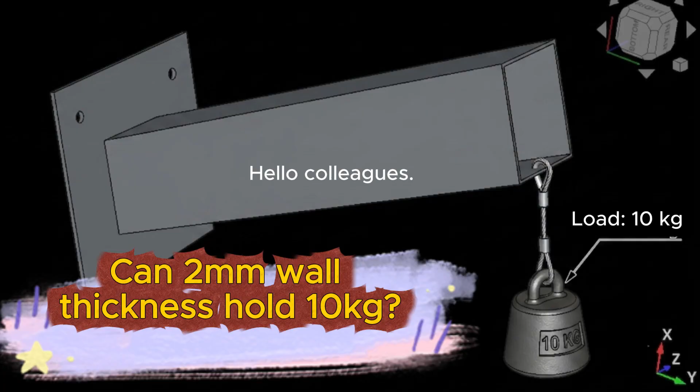Hello, colleagues. We are here with a new FreeCAD 1.1 video. Today, we will analyze the strength of the system you see on the screen under a 10 kilograms load using FreeCAD version 1.1.1. We will see in which direction and how much our material will flex, bend, or whether it will break under this load. We will also analyze the risk level of this amount of deflection and bending.

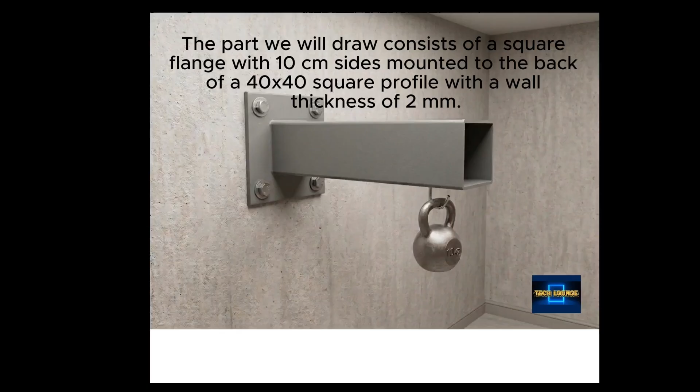First, we will quickly draw this part in FreeCAD. Then we will move on to the analysis phase. The part we will draw consists of a square flange with 10 centimeters sides, mounted to the back of a 40 by 40 square profile with a wall thickness of 2 millimeters. The length of our profile will be 20 centimeters, fixed from one end and free at the other. In technical terms, we will draw a cantilever beam and then analyze it.

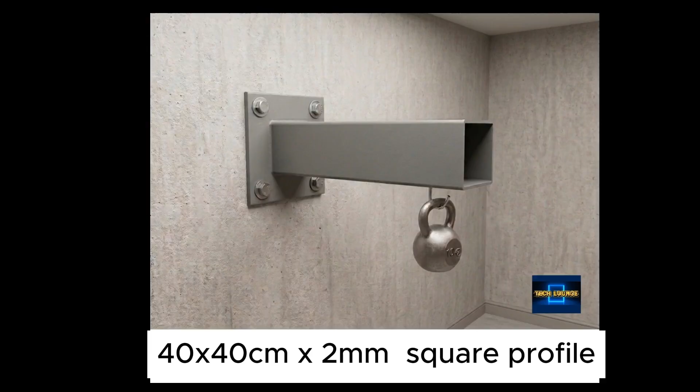Let's get started. As usual, we start our drawing with a parametric body. I am switching to sketch mode. From here, I select the XZ plane. In sketch mode, from the right side, I activate my rectangle tool and then the rectangle from center tool. Right from this center, I'm drawing a 40 by 40 millimeter square.

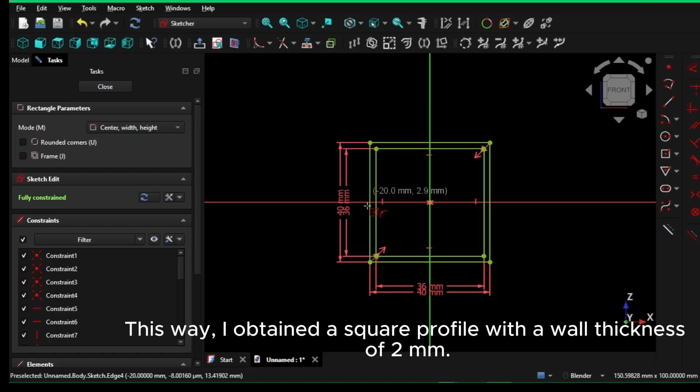Without changing my drawing tool, I continue with the same tool. This time, again from the center, I draw a 36 by 36 millimeters square. This way, I obtained a square profile with a wall thickness of 2 millimeters. I click Close, Exit, and extend it using the Extrude command by 200 millimeters, which is 20 centimeters.

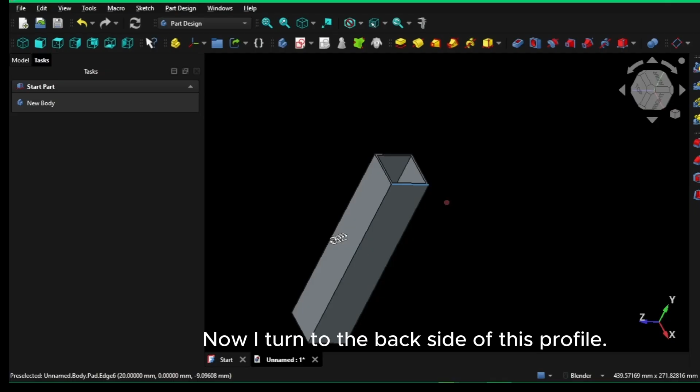Our profile is ready. Now I turn to the back side of this profile. I orient the rear view facing me, and by clicking on the wall thickness, you see, I create a sketch on this face. With this created sketch, again starting from the center, I draw a 10 by 10 centimeter square for the flange. And I click Close to exit. I select Extrude. I turn this into a flange with a thickness of 3 millimeters in the direction shown.

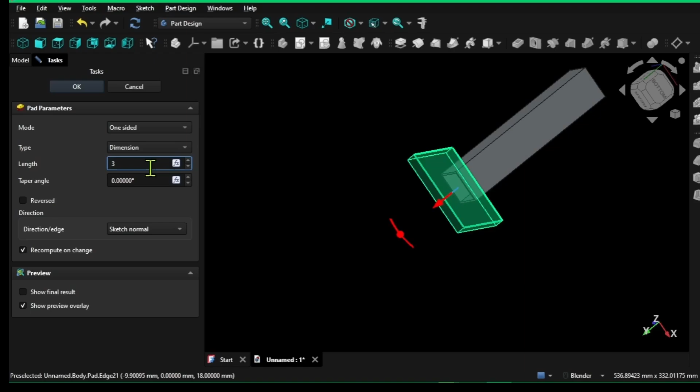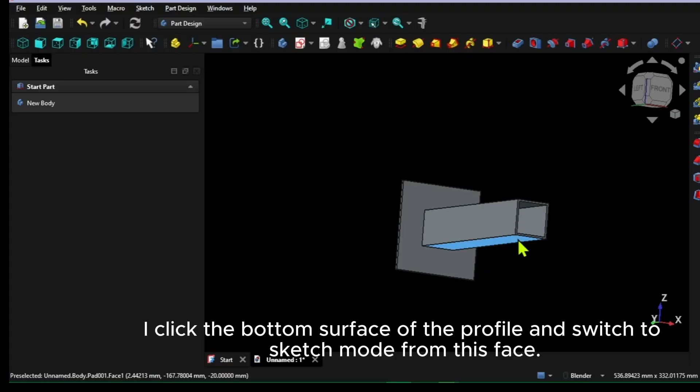Yes, our part continues to take shape like this. We have one final operation left. We will drill a small hole at the tip of the part. This hole will be where we suspend the weight. I click the bottom surface of the profile and switch to sketch mode from this face. I bring the part towards me a bit and zoom in slightly. I will drill a hole on this surface.

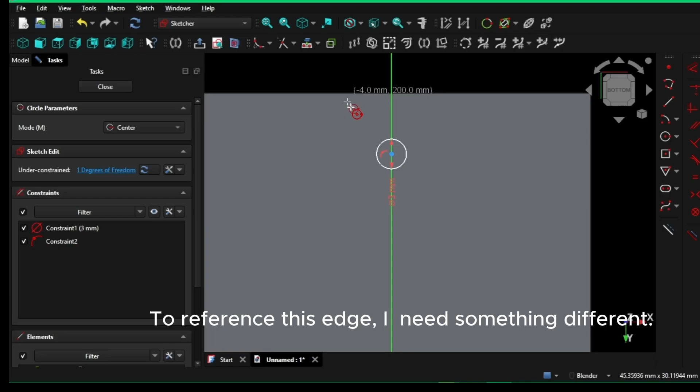I select the Circle tool. Since this axis is right in the middle, I draw a small 3 millimeters hole right here on my part. Or rather, I define a 3 millimeters diameter circle for the hole. Next, I want this circle to be 1 centimeter away from the tip of this profile, but I can't catch that edge. To reference this edge, I need something different. I click the external geometry icon up here. Then click the edge.

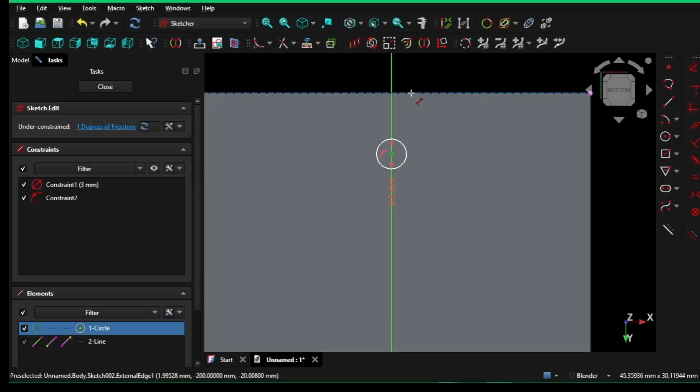Then I click the dimension tool and set the distance between the edge and the center of the circle to 10 millimeters. Yes, now it's offset 10 millimeters from the tip of the profile. I am done here. I use the pocket command to cut in this direction. As our wall thickness is 2 millimeters, the default value of 5 millimeters for the pocket command is OK. I click OK, and we have created the hole this way.

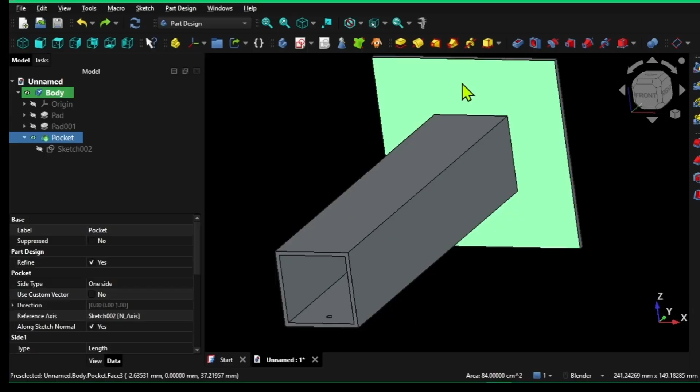Although they won't be included in our analysis results, to ensure a more realistic appearance, let's drill 4 mounting bolt holes on the rear flange. I click the front face of the flange. I switch to sketch mode. I select the circle drawing tool. I'm drawing a 5 mm diameter circle roughly around here. I want this circle to be 1 centimeter away from both the top and left edges of the flange.

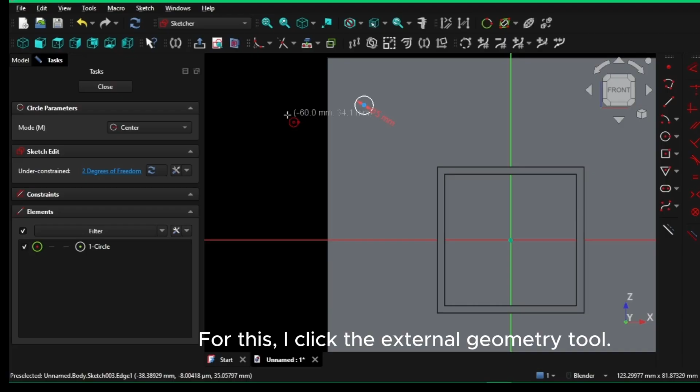For this, I click the external geometry tool. As before, I add a construction line to both edges of the flange. Then I select the Distance Dimensioning tool. I set the distance between the center and this line to be 10 millimeters. Similarly, I set the distance between the center and this line to be 10 millimeters as well.

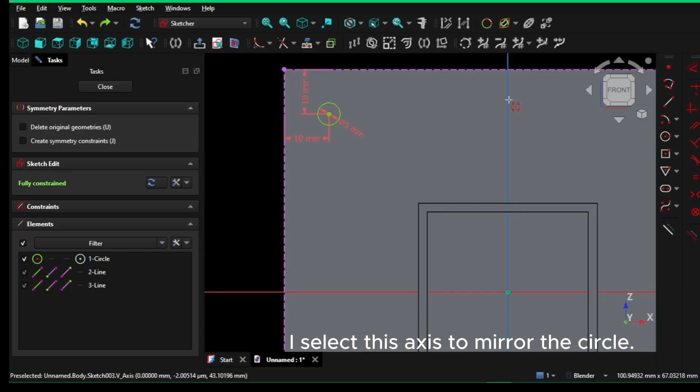Then I select my circle. I activate the mirror command. I select this axis to mirror the circle. Look, on the right side, it created a symmetrical copy relative to this axis. Now I select the right circle. I clicked mirror again. This time I select this axis as the mirror axis.

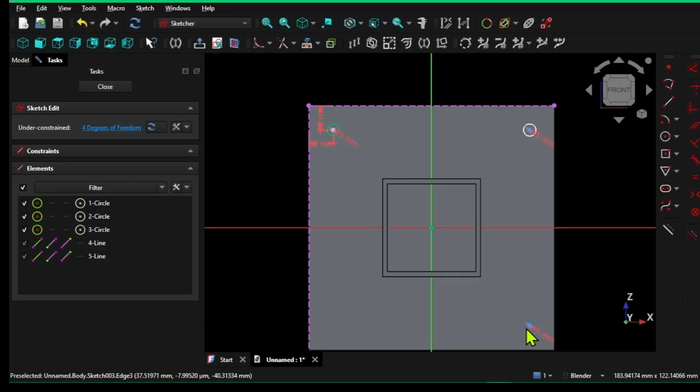I select the first circle once more. I activated the mirror command again. I selected mirror relative to this axis. Thus, 4 symmetrical circles were created relative to the center. I exit from here and create the 4 holes using the pocket command. I'll just leave the default 5 mm value as is. Now we are ready for the FEM analysis. We switch to the FEM workbench and start our analysis.

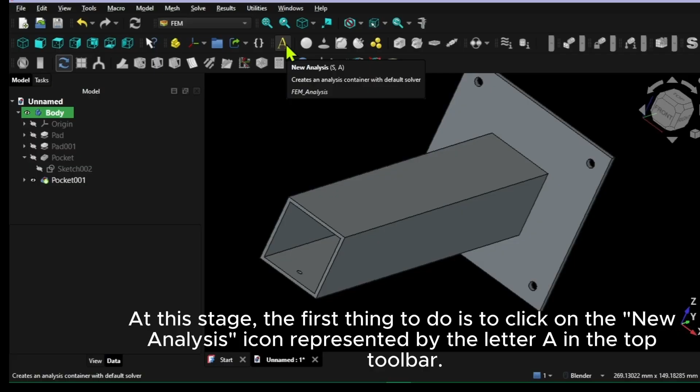At this stage, the first thing to do is to click on the new analysis icon represented by the letter A in the top toolbar. If you cannot see it here, New Analysis in the Model menu is the menu item that performs the same function. I click it, and as you can see, a new item named Analysis has been created in the feature

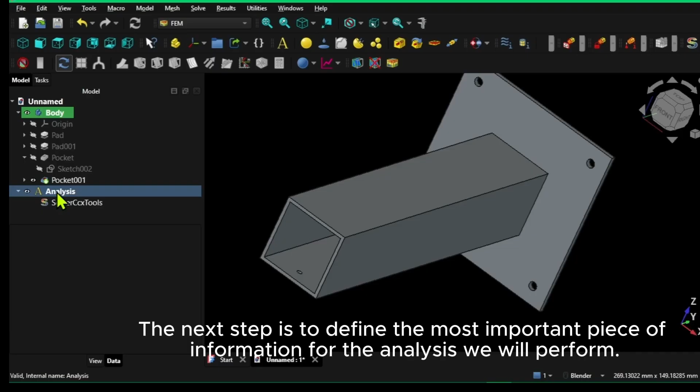tree on the left. The next step is to define the most important piece of information for the analysis we will perform. This information is the type of material. We know that the behavior of the material under load directly depends on its material type. In other words, we need to specify whether our part is plastic, rubber, composite, steel, aluminum, iron, brass, wood, concrete, glass, or any other material.

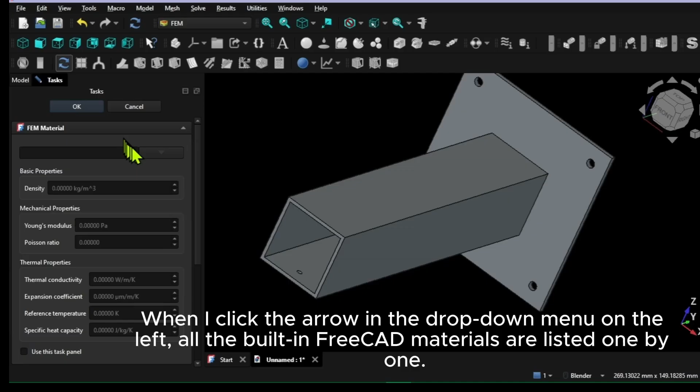To assign a material, while the analysis container is selected in the tree view on the left, I click the solid material icon on the top toolbar. When I click the arrow in the drop-down menu on the left, all the built-in FreeCAD materials are listed one by one. But before making a selection from this list, I'd like to mention an important issue with some of the materials listed here. At first glance, it seems there are many material types available here.

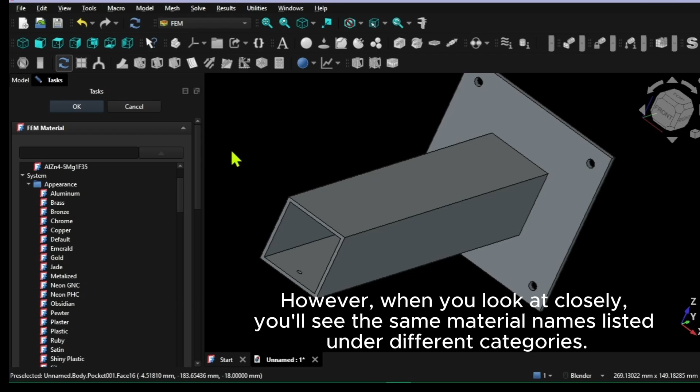However, when you look closely, you'll see the same material names listed under different categories. So, why are there duplicate names? For now I am exiting with cancel without assigning anything. If you pay attention to the tree view on the left, there is an object called SolverCcxTools at the very end of the list on the left. Keep this in mind. Now I click the solid material icon again.

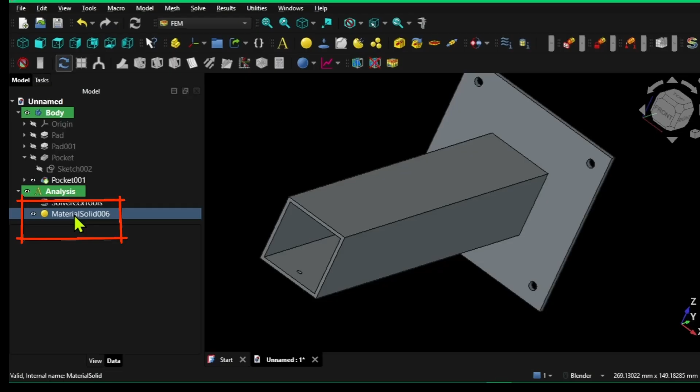This is the exact same list as before. When I select any material from here and click OK, for instance, I selected aluminum right now as an example, a new item has been added here. This item holds our aluminum data. However, I think I have selected aluminum right now. But look, when I click on this aluminum item, we see that all the values displayed here are 0.

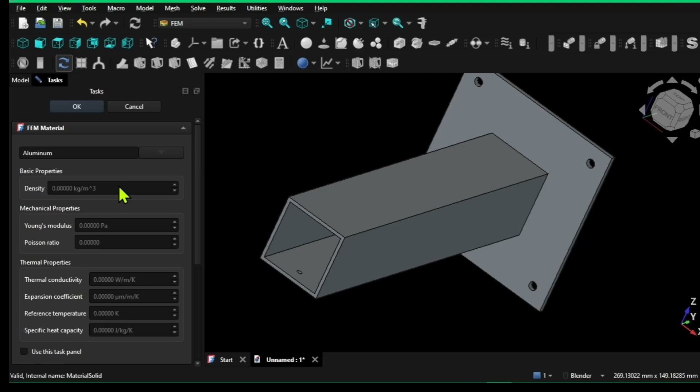If we continue our FEM analysis this way, we won't get any results from it. Therefore, we need to overcome this issue. The most solid first step in solving any issue is finding out where it comes from. And that's exactly what we're going to do here. First, I delete this faulty material definition object in my tree view by pressing the delete key. And I move on to the material assignment step again and expand my list.

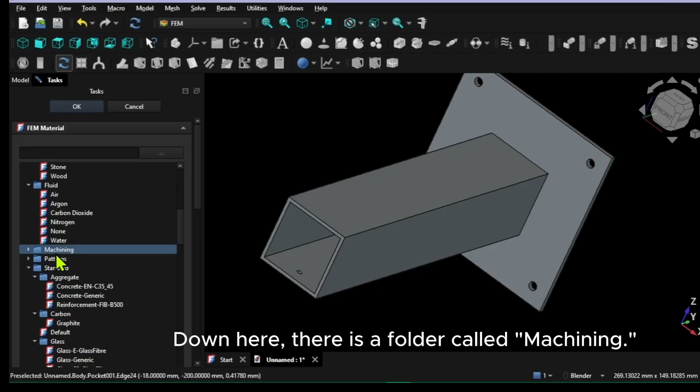If you pay attention to this list, you will see that there are various categories here. For example, there is a folder named Appearance, and there are many materials under it. Continuing through the list. Down here, there's a folder called Machining. Underneath it, a lot of materials are listed as well. There's a folder called Patterns. Under that one, different materials appear too.

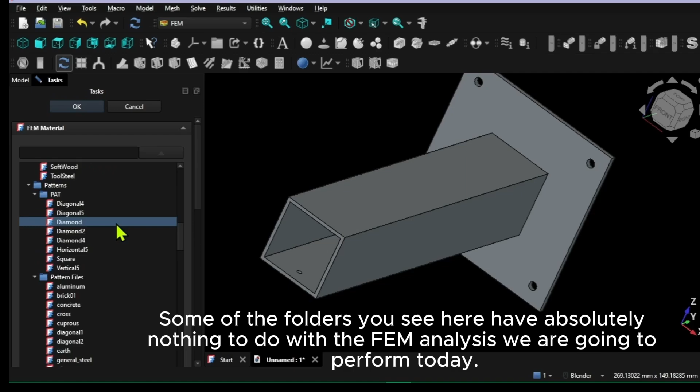It continues like this. Some of the folders you see here have absolutely nothing to do with the FEM analysis we are going to perform today. These are categories for different purposes, not for FEM analysis. For instance, this Appearance folder in the list you see here is a folder that holds visual coding and color information of the material.

Continuing further down. For example, there is a folder called Patterns. Underneath this, there are various materials as well. You can see them right here. This folder is a separate definition classified by technical standards for coloring of technical drawings or architectural plans. Scrolling through the list. This Machining folder holds cards containing the machining parameters required for machining operations. None of these are relevant to the FEM analysis we'll be doing.

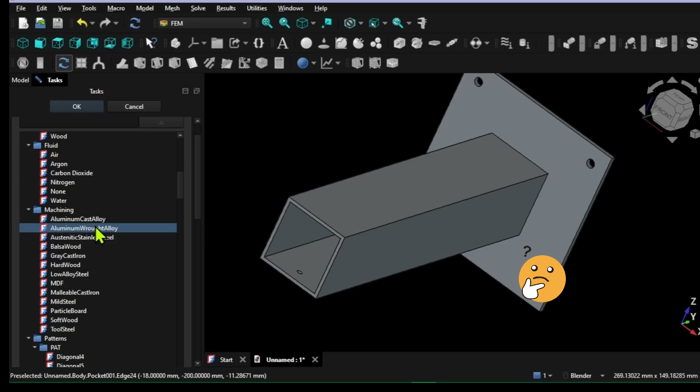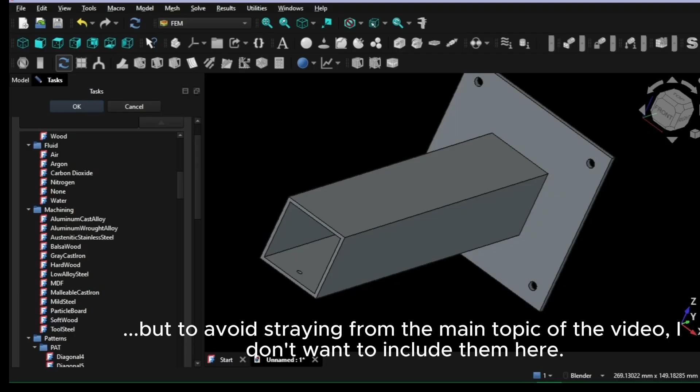Now let me be the one asking the question on your mind. If these categories are not for FEM analysis, then why do these choices show up in the FEM materials list? This is a topic that is still heavily debated on various forums and hasn't been conclusively answered yet. I have some guesses on this matter as well. But to avoid straying from the main topic of the video, I don't want to include them here.

All we can do is double-click on the material object in the tree view on the left after making a selection, and check if the parameters show up as 0. As you can see right now, for the aluminum I selected, they have come up as 0. This means that I haven't actually selected something from the correct category. I exit and open the material cards list again. Now I will find aluminum from a different folder here.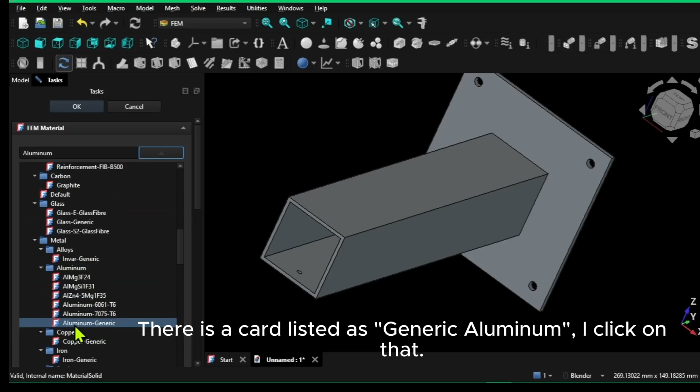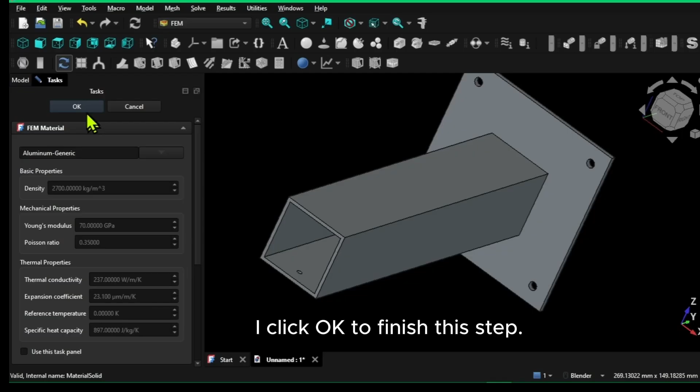Look, there are aluminums here. There's a card listed as generic aluminum. I click on that, and then click OK. I double-click on the material object in the tree view on the left, and the values appear here. Now I have selected the correct material. I click OK to finish this step. The next step is to define to the system which end of this part will be the fixed end.

Since our part will be mounted to a wall by its flange, we'll define this flange as a fixed support. The command I will use to define the fixed end of my part is the fixed boundary condition command shown right here on the top toolbar. If it is not visible here, alternatively, you can access the same command from the Model menu, under Mechanical Boundary Conditions and Loads section.

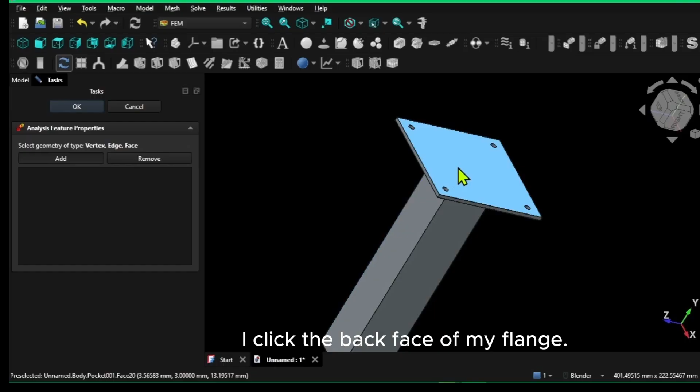I click the command. I click Add from the left panel. I rotate the part. I click the back face of my flange. The name of the back face of my flange appears here, and I click OK. As you can see, a new item named Constraint Fixed has been added to the tree view.

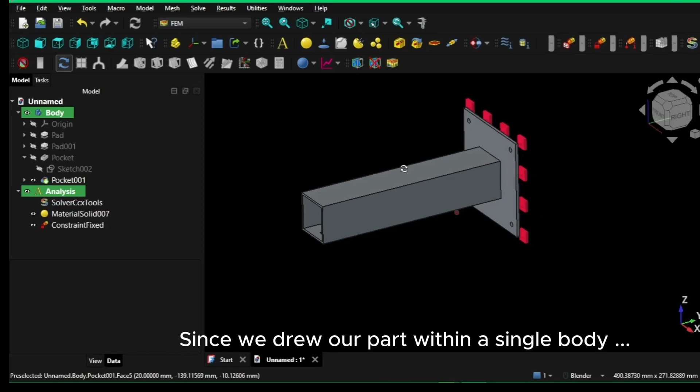At this point, we need to clarify something. Since we drew our part within a single body, from FreeCAD's perspective, this is not an assembly of a separate flange and profile. This is a single solid part. What this means is, since the analysis we will perform targets the material's strength under load, details regarding how the profile is attached to the flange and the quality of that connection are excluded from calculations.

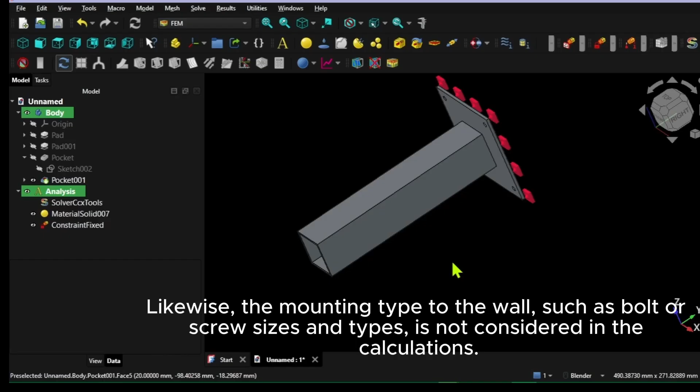In other words, the joining method, whether glued, welded, or fastened, is not considered in calculations. Workmanship and connection defects are also not considered in calculations. Likewise, the mounting type to the wall, such as bolt or screw sizes and types, is not considered in the calculations. Besides, the wall type such as concrete, metal, or plastic, and its thickness are not considered in the calculations. We could easily expand this list with similar assumptions.

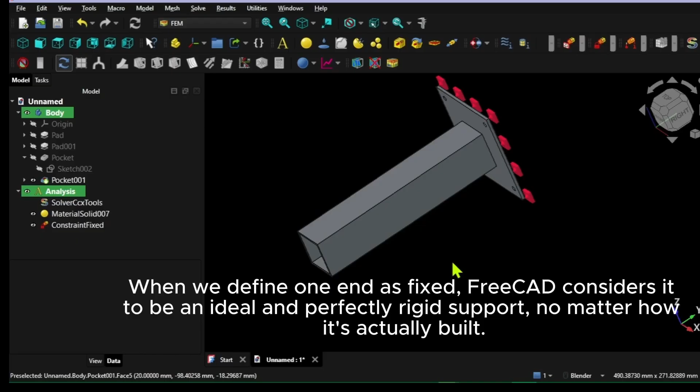When we define one end as fixed, FreeCAD considers it to be an ideal and perfectly rigid support, no matter how it's actually built. So in our case, the rear flange is treated as a perfectly rigid support.

The next step is to apply the load to the front hole of our part. To do this, we'll click the icon right next to our previously used one on the toolbar. When we click it, a set of icons will pop up. From there, we'll select Force Load. If you think you'll need these often in the future, you can drag the icons here like this to keep them accessible. I begin operations by activating the Force Load command.

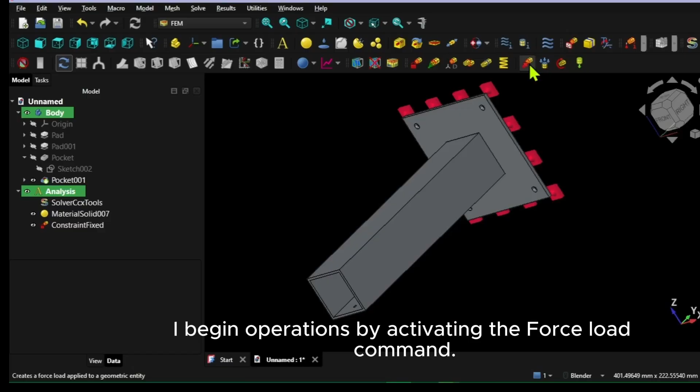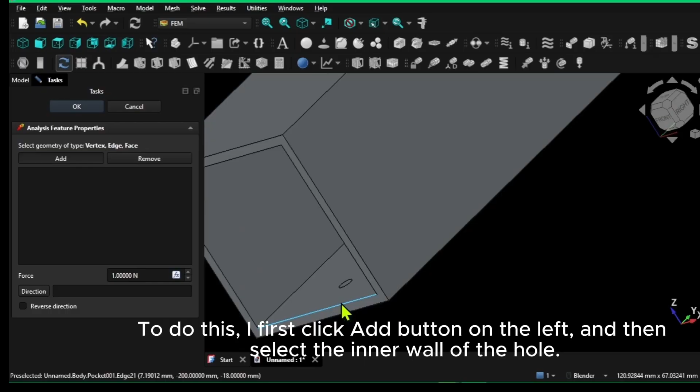A panel opened on the left. Now we will specify to FreeCAD that the front hole of the part will be the location where the load is applied. To do this, I first click the Add button on the left, and then select the inner wall of the hole. As soon as I select it, the name of the surface appears on the left panel.

However, if you notice, the arrow direction is currently pointing to the right. This indicates that the load would act on my part as a push from the left. That is not what I want. I want gravity to act along the vertical axis, so I need to make the arrow parallel to the vertical axis. In FreeCAD, we can easily define force directions by referencing existing geometry instead of entering complex vector values.

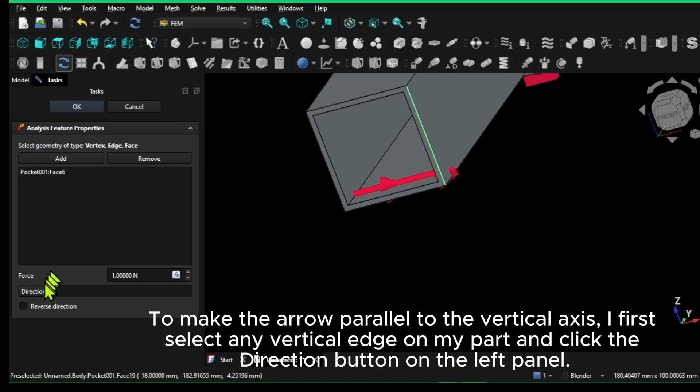To make the arrow parallel to the vertical axis, I first select any vertical edge on my part and click the direction button on the left panel. As you can see, my force direction changed. It looks okay, but it's not. As you can see, it's inverted. By clicking reverse, I adjust the direction of my force toward the desired orientation. So now, the load will act from top to bottom, meaning gravity is directed just as we need.

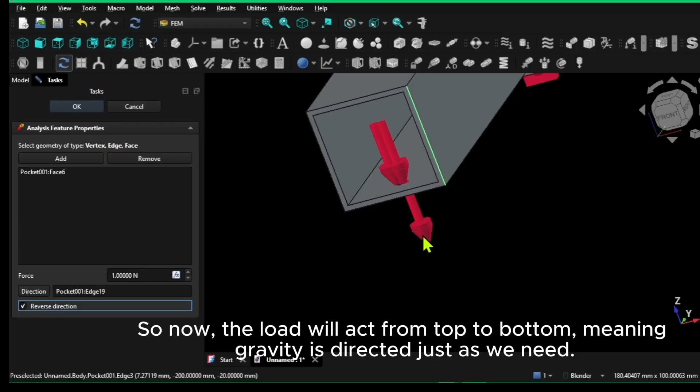The last step I need to perform is to enter my weight here. Since my mass will be 10 kilograms, I define my load as 9.81 newtons times 10, which equals 98.1 newtons, and click OK. As you can see, my load has also appeared as a separate element here in my tree view on the left. The next step is to mesh the part.

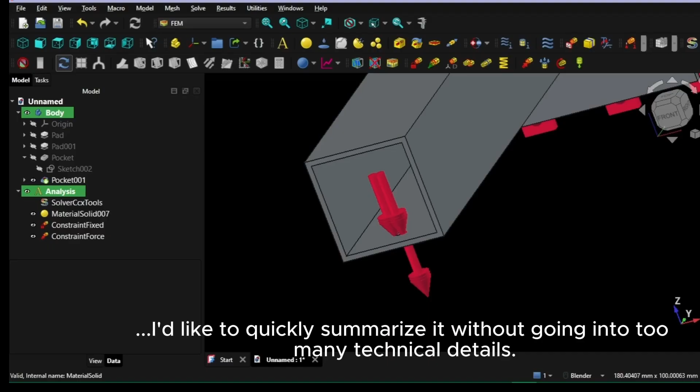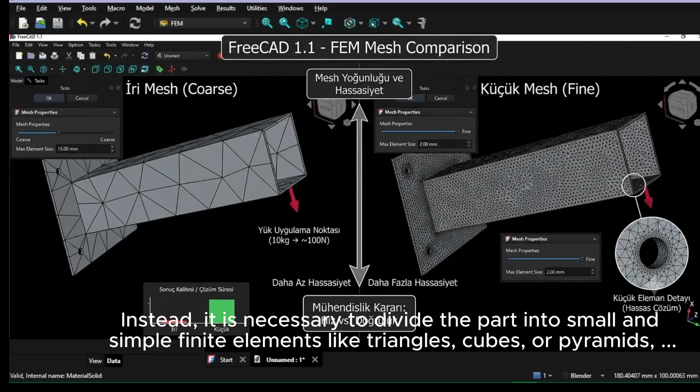Since continuing without knowing what mesh means would leave the tutorial incomplete, I'd like to quickly summarize it without going into too many technical details. FEM is an abbreviation that stands for Finite Element Method. Just like in our part, analyzing systems made up of various geometric shapes and structures as a single whole is nearly impossible. Instead, it is necessary to divide the part into small and simple finite elements, like triangles, cubes, or pyramids, and solve each section separately, and then aggregate these solutions to reach the total result. This process of dividing into small and simple elements is called meshing.

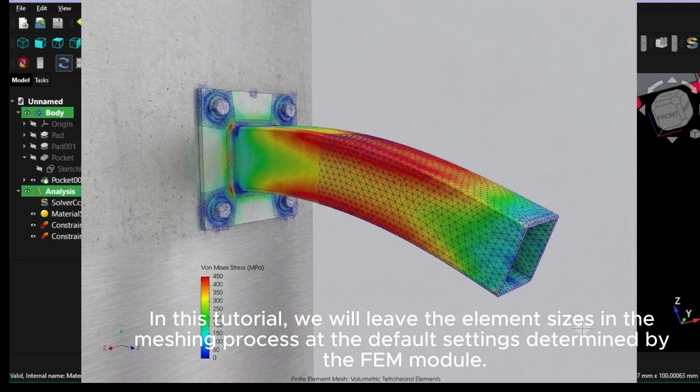In the meshing process, the smaller these elements are, the closer the final calculated result will be to reality. However, as these small elements increase, the matrices generated in the calculations also reach massive sizes. In such cases, your computer's performance and RAM capacity are of great importance. In this tutorial, we will leave the element sizes in the meshing process at the default settings determined by the FEM module. These settings are quite sufficient for basic daily analyses. However, if desired, we can also define this element size ourselves in the FEM module.

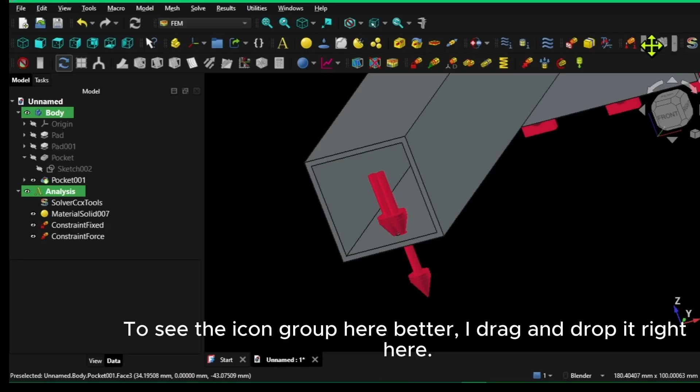To subject the part to the meshing process, we will use the command group shown here on the toolbar. To see the icon group here better, I drag and drop it right here. As you can see, different commands are available for different meshing operations.

Two of these are FEM Mesh by Netgen, and right next to it FEM Mesh by GMSH. These are the two most commonly used methods for finite element analyses. To start the meshing process, I select my part, which is the latest object in the tree view on the left. Then I activate the second of these mesh types, the FEM Mesh from Shape by GMSH command.

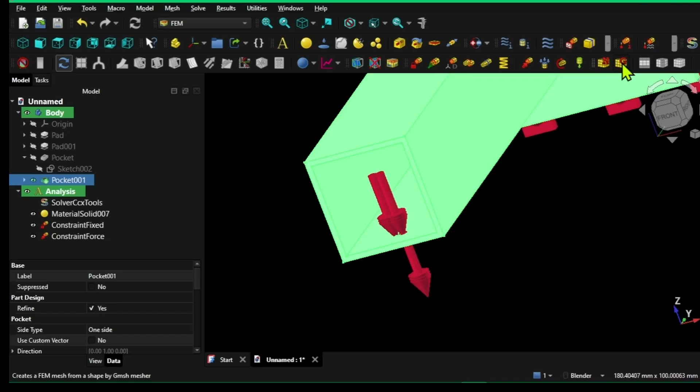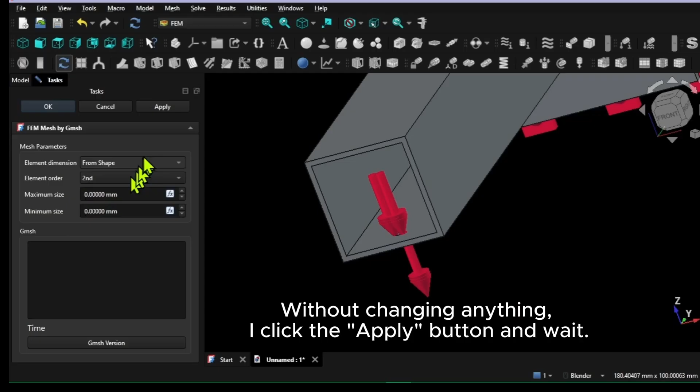A panel like this opened on the left. The maximum and minimum size values shown in this panel are where we will define the mesh element sizes mentioned earlier. If we leave these values unchanged as 0 and click Apply directly, the meshing process will be performed according to its own default values. Without changing anything, I click the Apply button and wait.

And the meshing process is complete. I click OK and exit. It took 7 seconds for my part with default mesh size setting. Let's align our part directly in front of us. This way, we can see all of it. Everything is ready. Now we can move on to the calculation phase.

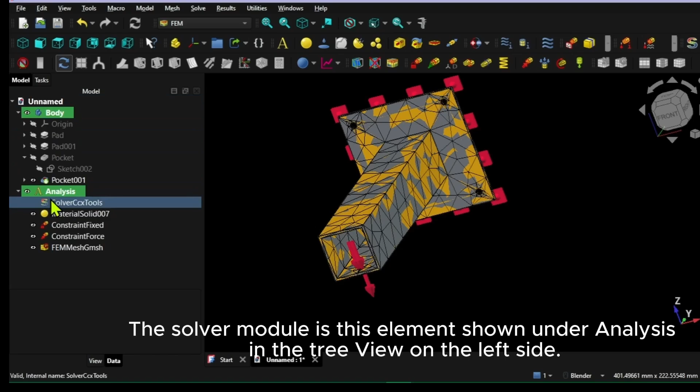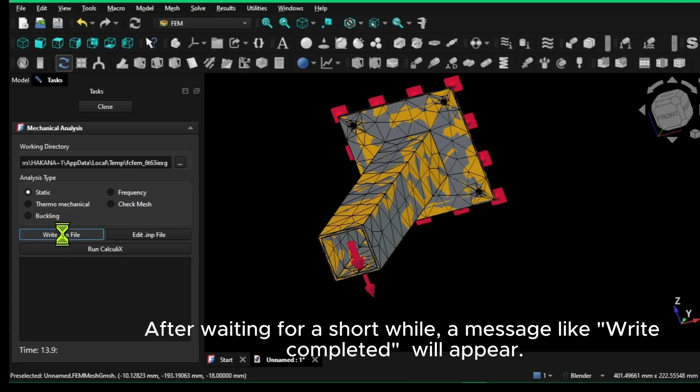The solver module is this element shown under Analysis in the tree view on the left side. I double-click on it. A panel like this on the left appears. In this panel, make sure that Static is selected under the Analysis type options. Then I click the Write Input File button. After waiting for a short while, a message like Write Completed will appear.

Right now, FreeCAD has created a file in the background containing all the necessary data to perform the analysis. Next, by clicking the Run CalculiX button, I tell it to start the calculations. I don't know if you noticed, but right now, we are facing an error. Look, in the lower left window. It says CalculiX started running at 0.1 seconds and stopped within 0.1 seconds.

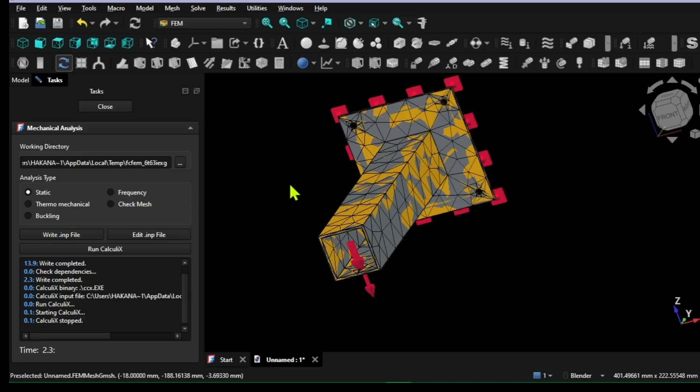This is not a normal situation. It shouldn't have been like this. I know the cause of this error, and now I will explain it to you. Before that, how I access this information is a subject as important as the error itself. Log records are always king. Now from the top menu bar, let's follow the path: View, Panels, and then Report View.

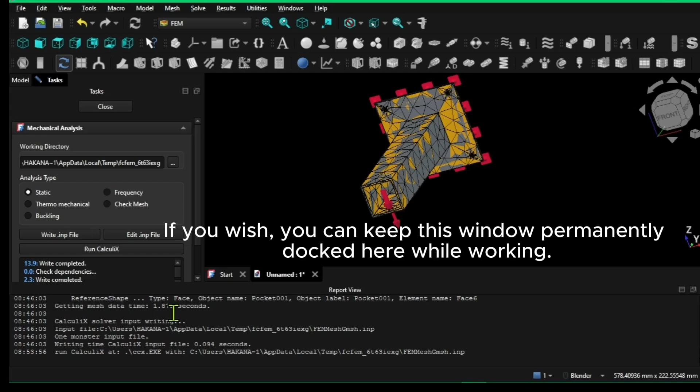Look, a window opened at the bottom. This window shows the operations performed in the background and errors raised while FreeCAD is running. If you wish, you can keep this window permanently docked here while working. However, because it creates visual clutter, I prefer accessing this window only when I need it. I'm sure we'll find the culprit right here.

I think I got it. If you pay attention to the bottom lines, it shows us right here what error we encountered. I close the Report View window and focus on the file path shown right here. Because the file path here is in Windows abbreviated file path format, FreeCAD cannot see this folder directly. Furthermore, it is also a problem when the file path contains symbols outside of standard English characters.

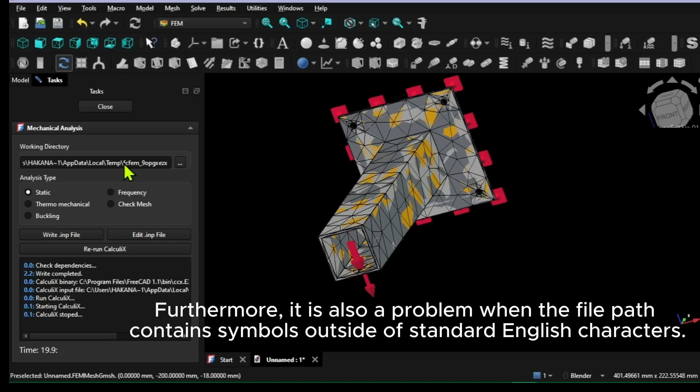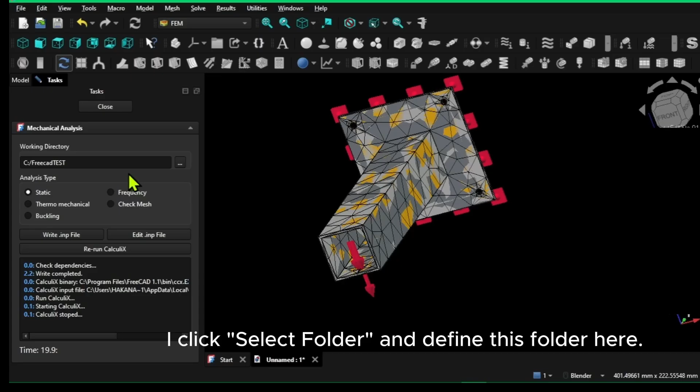To overcome this issue, a simple file path would be enough. I click the 3 dots on the right of the path and navigate to the Windows C root drive, and create a new folder here named FreeCAD Test. I click Select Folder and define this folder here. Now I click the Write Input File button again to ask it to prepare the necessary file for calculations.

As you can see, it took only 1.5 seconds and completed without any errors. Everything is properly set up for the analysis. I rerun CalculiX for final calculations. It is running right now. After 1.5 seconds, it showed me here that it completed without any errors. I click Close to close this panel.

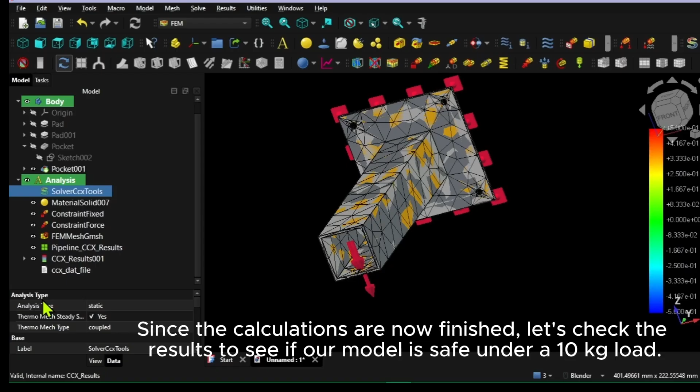Since the calculations are now finished, let's check the results to see if our model is safe under a 10 kilograms load. So, how will we do this? In our tree view on the left, we see that a new element named CCX_Results001 has been added. It's a container object that holds all the calculated results. I double-click on it.

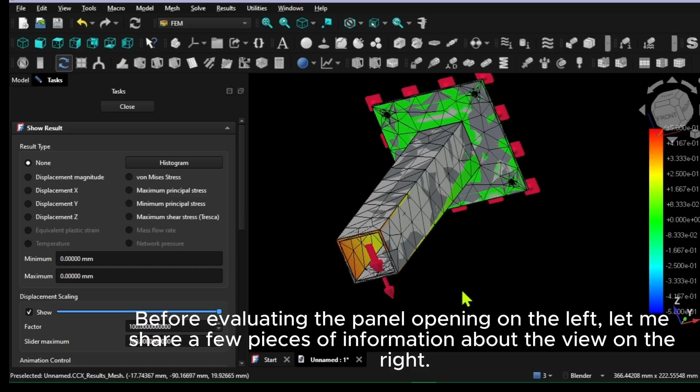Before evaluating the panel opening on the left, let me share a few pieces of information about the view on the right. The light and dark gray areas you see on the part indicate regions where minimum stresses occur, meaning these are the regions almost entirely unaffected by the load. Light and dark green parts indicate medium-level stresses. Yellow and orange regions show high-stress areas, and red regions show maximum stress areas.

When we examine our part by rotating it slightly, we see mild orange-colored stresses on the vertical walls on both sides of the hole. Other areas have significantly lower stresses.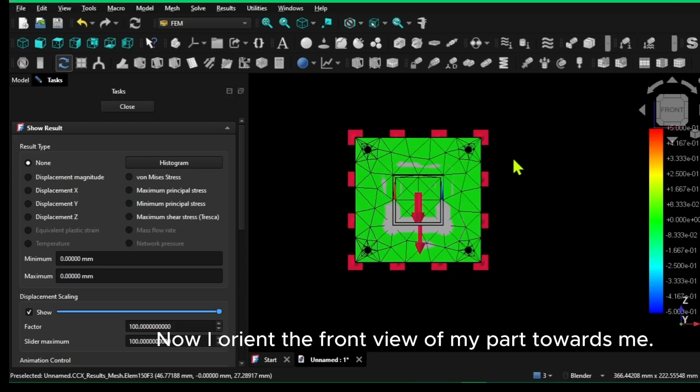Now I orient the front view of my part towards me. I tilt it slightly downwards. As can be seen, we define the direction of force applied by the load in this manner. In other words, we define the direction of gravity in this direction. Therefore, we expect our part to bend downwards under this load.

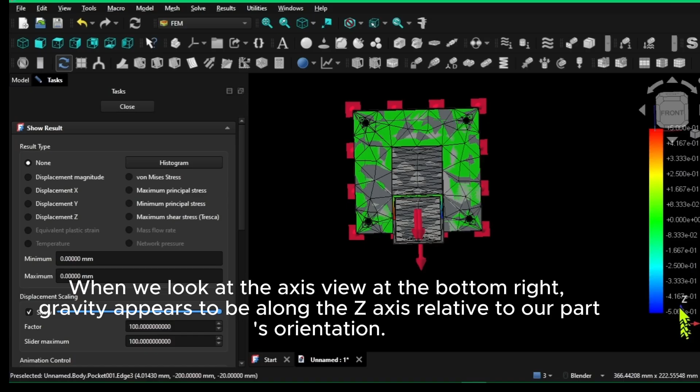When we look at the axis view at the bottom right, gravity appears to be along the z-axis relative to our part's orientation. Therefore, the up and down movement will take place along the z-axis. Now let's focus on the left panel. The displacement x, displacement y, and displacement z options show the amount of bending along each axis. I'll select displacement z, since gravity acts in this direction, as mentioned earlier. This may vary for you in your other drawings.

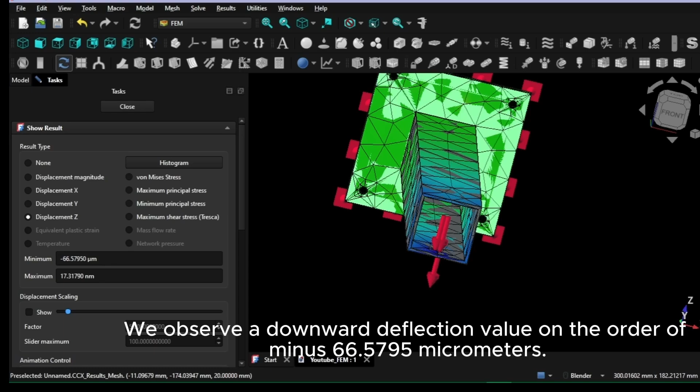Since we drew the part centered at the origin point, a negative z value indicates downward deflection, while a positive z value indicates upward deflection. We observe a downward deflection value on the order of minus 66.5795 micrometers. This value roughly corresponds to 1/15 of a millimeter.

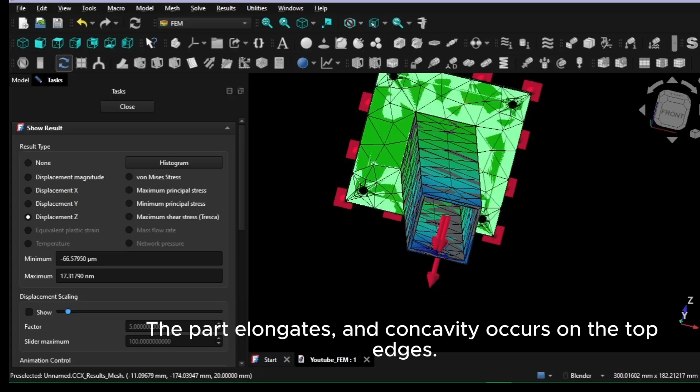You might ask why we see a deflection value in the positive direction, that is upwards, while the load pulls downwards. As the material flexes downwards, the edges deform at the same time. The part elongates, and concavity occurs on the top edges. For this reason, upward elongations can occur. However, looking at the value on this part, the 17.3179 nanometers value we see actually corresponds to approximately 1 in 60,000 of a millimeter, meaning it is practically negligible.

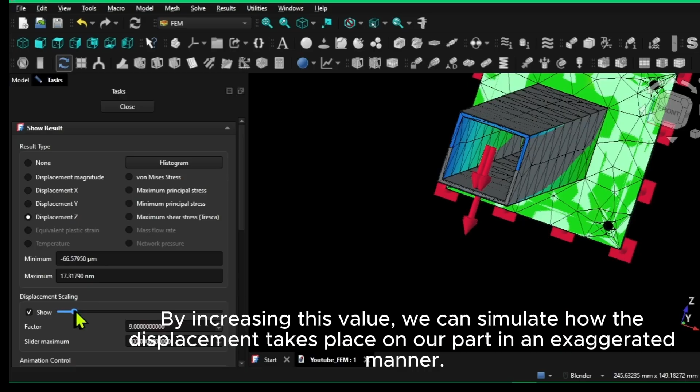We continue examining the panel on the left. The show option you see here is a section designed to show the part's deflection in an exaggerated manner. By increasing this value, we can simulate how the displacement takes place on our part in an exaggerated manner. As we move the slider, a real-time simulation is displayed on the part, as shown here.

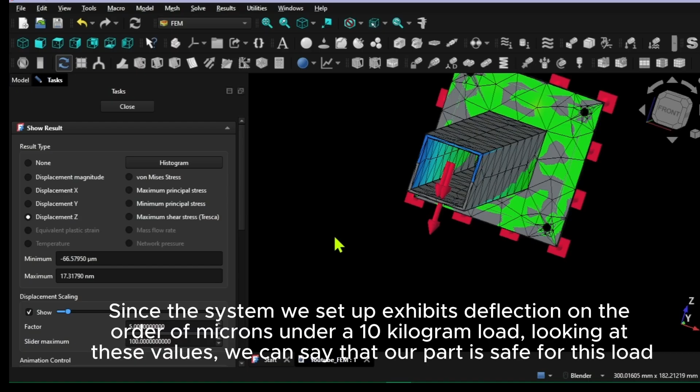Since the system we set up exhibits deflection on the order of microns under a 10 kilogram load, looking at these values, we can say that our part is safe for this load. However, we are not done yet. We also need to check the von Mises stress values. While the analysis we just did shows in which direction and how much the part bends, the analysis we will do now tells us whether this amount of deflection will cause the part to break or permanently deform.

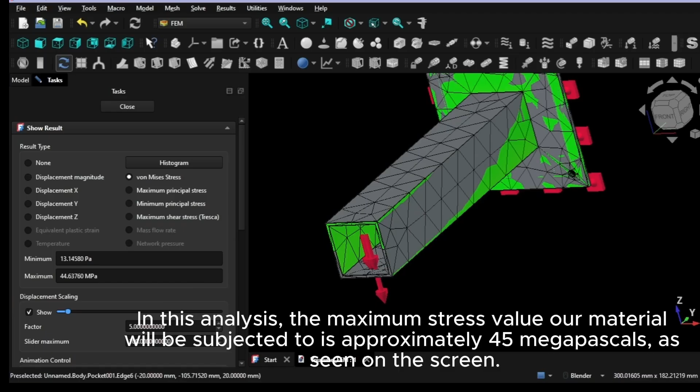To perform this analysis, I click the von Mises stress option on the left panel. The yield strength value of the aluminum material we selected is 240 megapascals. In this analysis, the maximum stress value our material will be subjected to is approximately 45 megapascals, as seen on the screen. This value is about 1/5 of the material's 240 megapascal capacity. Generally, including safety tolerances, values of 2 and above are considered safe.

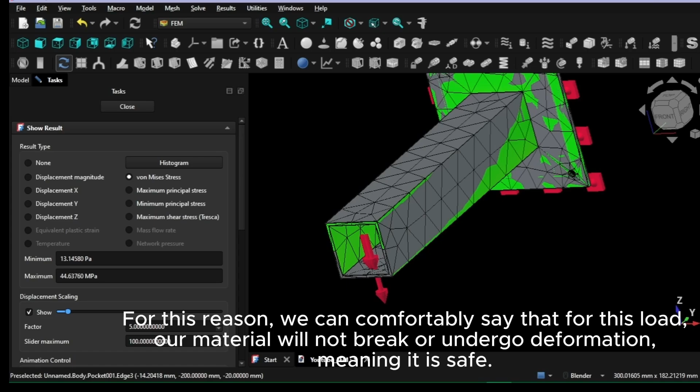For this reason, we can comfortably say that for this load, our material will not break or undergo deformation, meaning it is safe. At matweb.com, you can find the yield strength and all other technical parameters for the materials in your design. Now let's see what the situation would be if our weight were 100 kilograms instead of 10 kilograms. But don't worry. Since our infrastructure is ready, we will see all the results in front of us within a minute with just a few clicks.

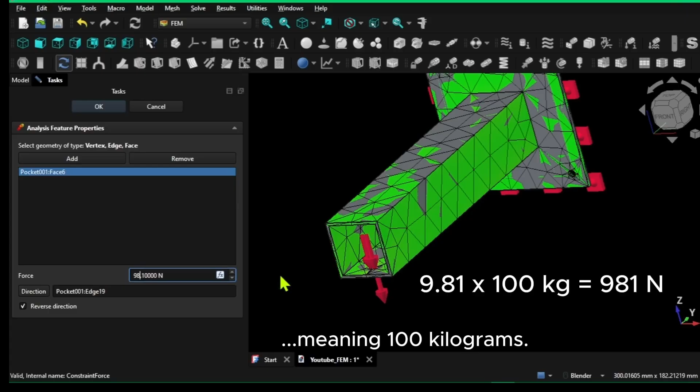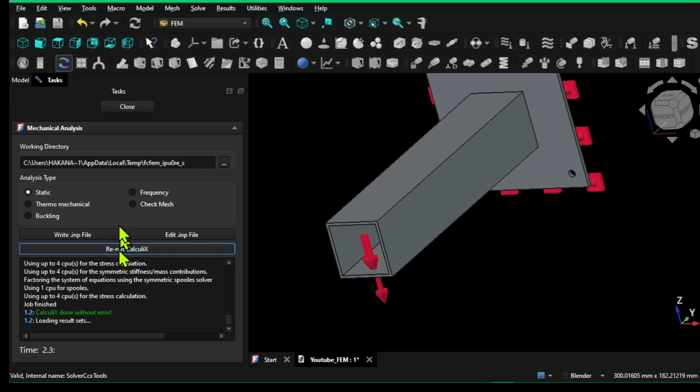I close this screen by clicking close. I double-click on the constraint force element where I define my load. From here, I change my load to 981 newtons, meaning 100 kilograms. The load is applied. I click OK. Then I go to the solver element. Click it. I click Write .inp File button. I click Run CalculiX. The process is completed. I click Close and move on to examining the results. I click Results container on the left.

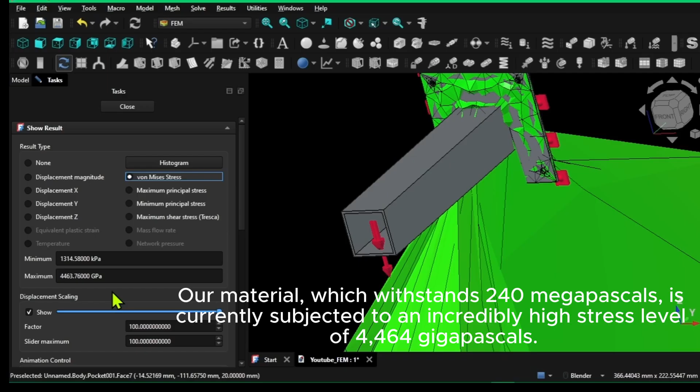As you can see, the deflection along the z-axis turned out to be 6,658 millimeters. That's more than roughly 6.5 meters. And as you can see from the view on the right, the situation is not good at all. Now let's look at the failure analysis. I clicked von Mises stress option. Our material, which withstands 240 megapascals, is currently subjected to an incredibly high stress level of 4,464 gigapascals. With these results and the view on screen, it is certain to fail.

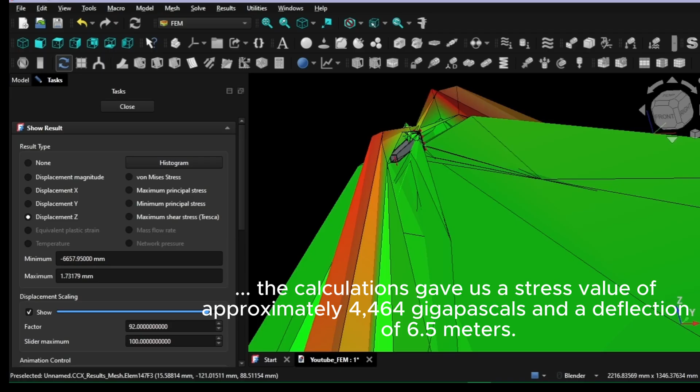In short, the structure we built with this material is by no means suitable or safe for this 100 kilogram load. When we applied a 100 kilogram load to our structure, the calculations gave us a stress value of approximately 4,464 gigapascals and a deflection of 6.5 meters. For a 20 centimeter part to flex 6.5 meters is physically impossible.

The most important engineering lesson we should take from this is linear analysis solvers do not know that the material will break. According to mathematics, as you multiply the load, it simply multiplies the result. This result clearly shows us that the part has far exceeded its yield limit, has suffered total failure, and that this design cannot be used under this load.